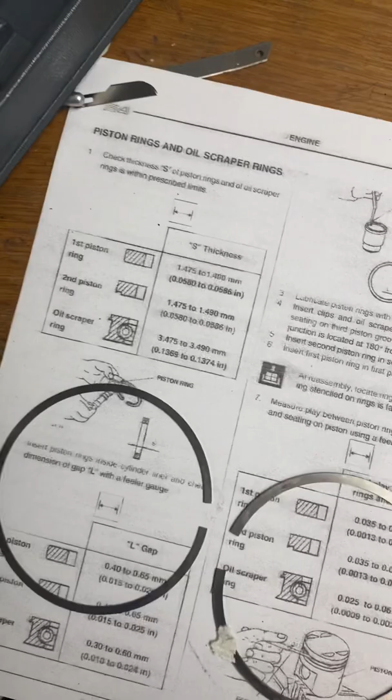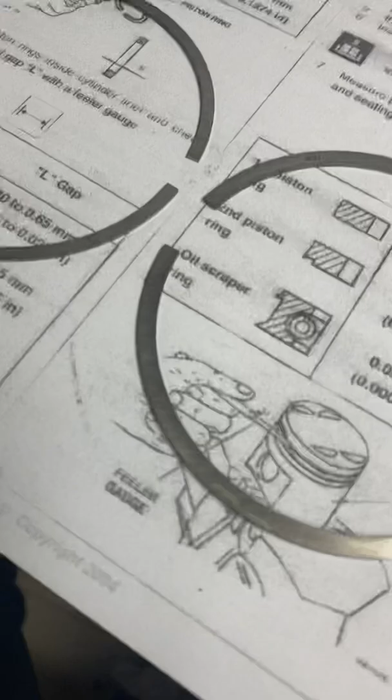So here's a dilemma for all you guys following along with the build. I was measuring my ring gap. This is the 5th one I brought out. And on the first ring, the thinnest ring, the gap is a little too tight.

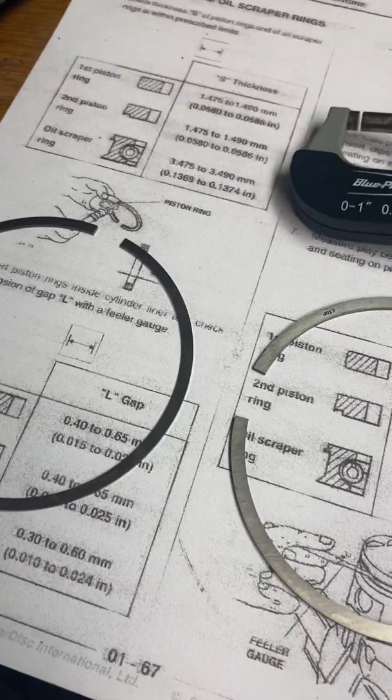So I'm gonna have to file that. But more interestingly, they give you a thickness for what each ring should be, how thick it should be. At first I checked it with my micrometer, and it came out too thin. I was like, well, I worked 7 days this week, maybe I'm tired and reading it wrong like an idiot. So I took the digital caliper

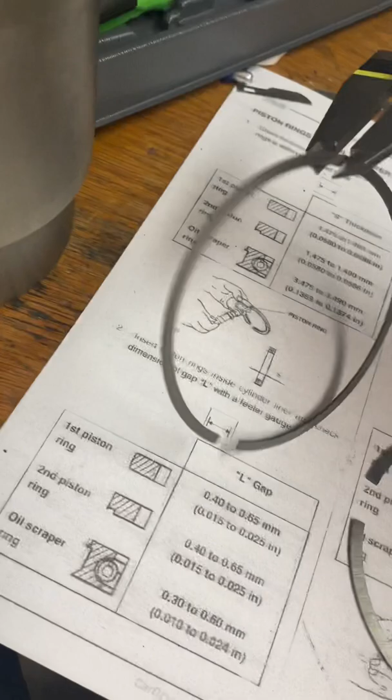I decided to do the same thing and double check my work with it. I'm getting 0.045 of an inch on the first ring. If you look at the chart, it says it's supposed to be 0.0580 to 0.0586, and we are well under that by about 0.013. That's a lot thinner.

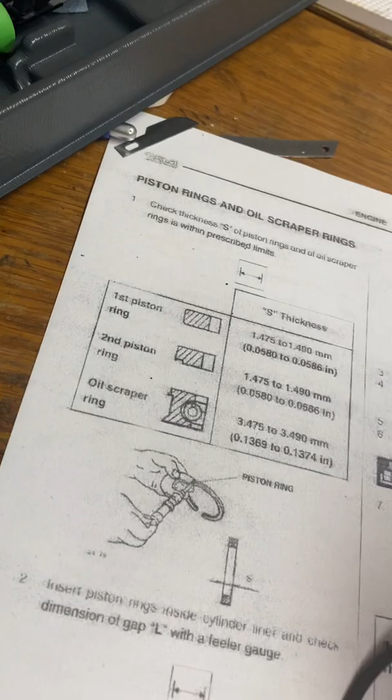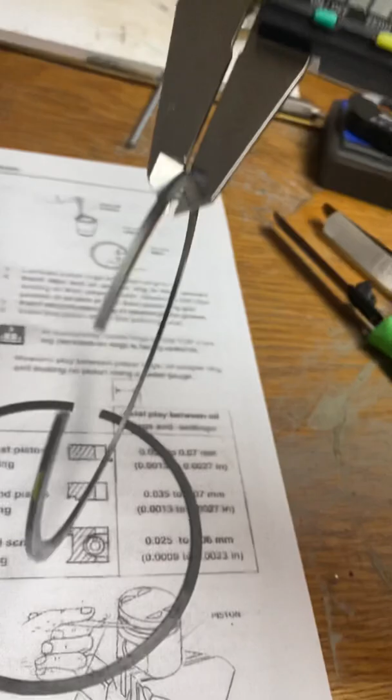So then I measured the second ring, which is supposed to be 0.0580 to 586. Again same thickness it says, and that is correct. However, when you look at the rings, they don't even look the same thickness at all. You can tell the first ring's much thinner.

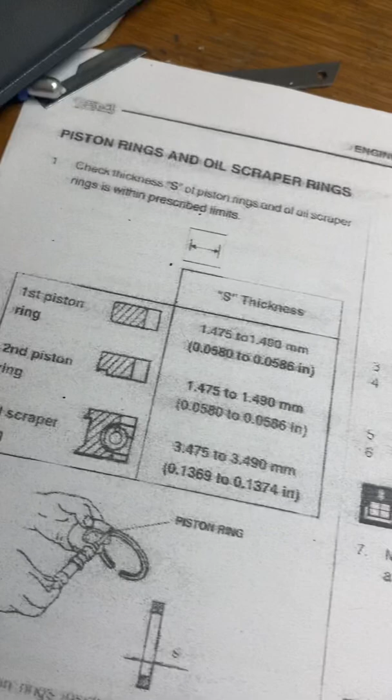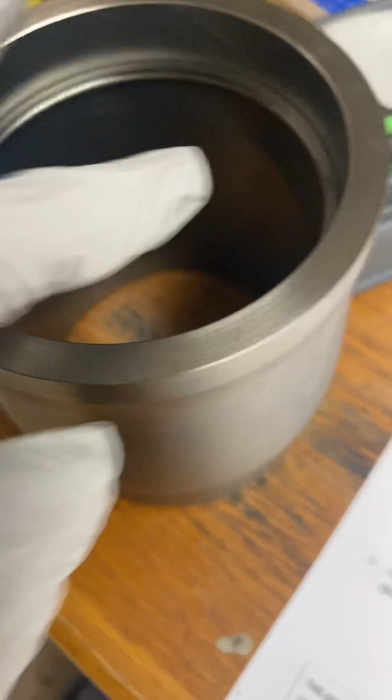So why do I have the wrong rings? First piston ring, second piston ring, and then the oil scraper ring, which is in here. I was measuring the gap, and that is the correct thickness as well. But I guess we'll figure that out.

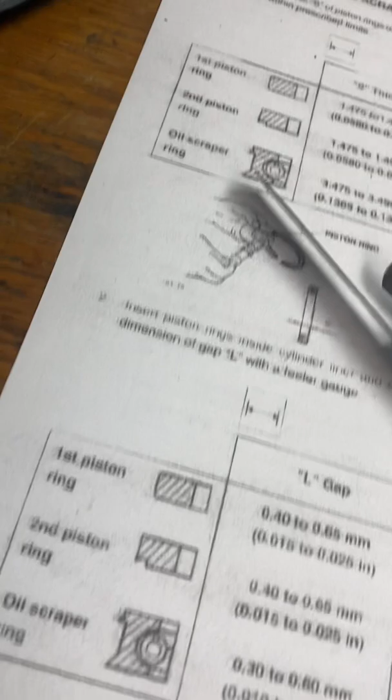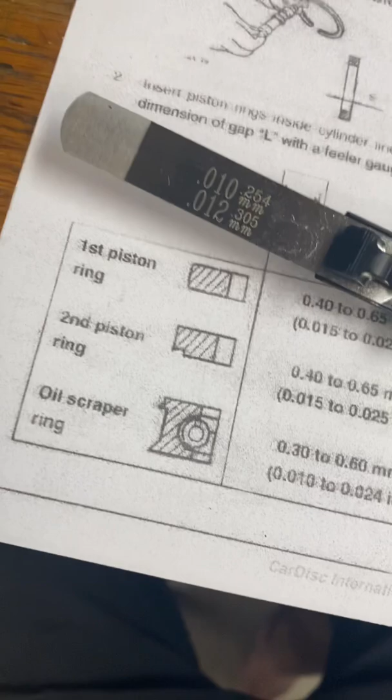But for now, the gap is pretty simple. I just put the piston ring in there, push it down with the piston evenly, and then take the minimum measurement, which for the oil scraper ring is 10th thou, so the little end of this feeler gauge, which does fit. And what shouldn't fit is 24th thou, but 25 don't fit. So that's pretty good.

Let's open up another one of these new old stock liners and see what the deal is with this one. I'm wearing gloves just because I don't want anything to flash rust. I should put my phone down first. No, I got it.

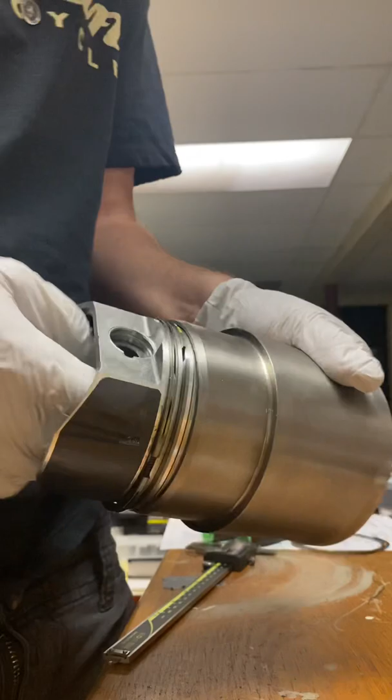So here's the second one. I'm going to see if I can stand this up in a way. There we go. So I'm going to pop this out. There's the piston, the rings.

Let's take the top ring off and see if it's still the same thickness. So I rotate it around, find this top ring, carefully remove it. These have a C - I don't know if you'll be able to see that - they have a C on the top, and the bottom 2 rings, it says top on the top. Can't mix that up, it's not good.

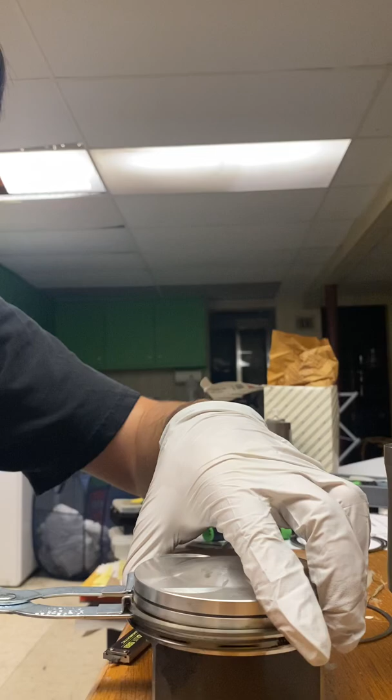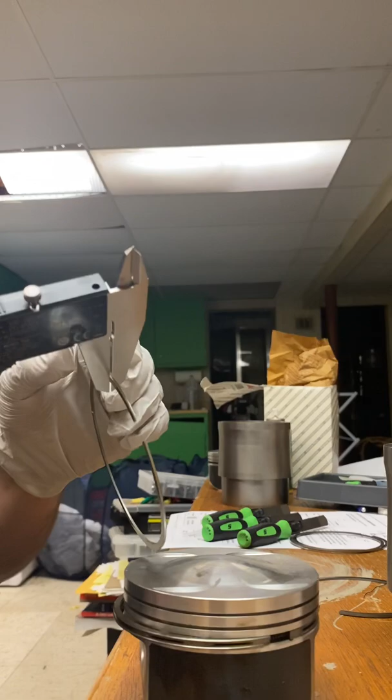So what I do is I only take off the top 2 rings at first, and I'll show you why in a second. So let's measure the thickness of this one again. 0.455, same as before with that top ring. So that's, according to my manual, that's incorrect. So that's interesting.

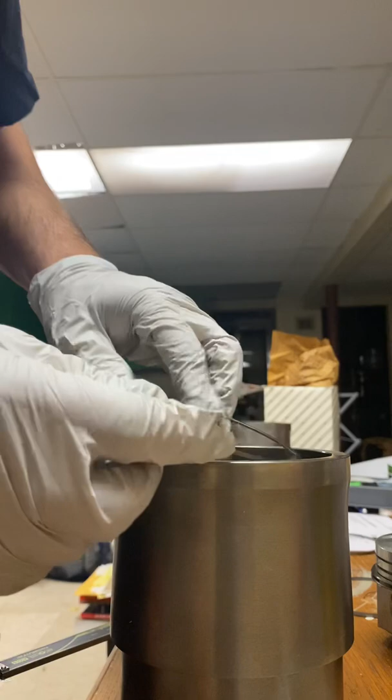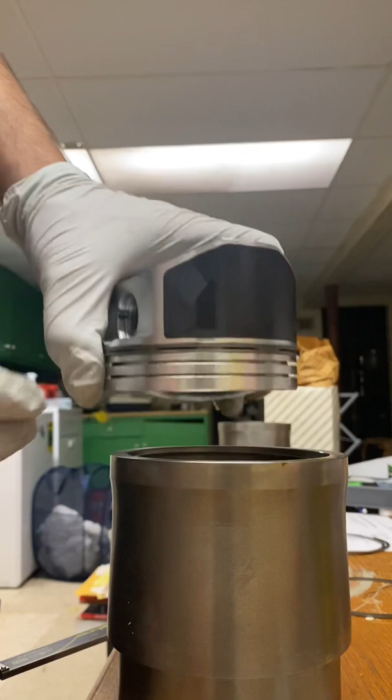But let's measure the gap. So I wipe out the cylinder, put a little bit of oil to keep the rings from scratching, rub it around in there. And then what I like to do is I start with the top ring, make sure it's facing the correct way, and pop it in by hand. The reason I leave this ring on the piston is so that when I push it in, I can hit that ring and press it evenly, so I know it's even in the cylinder.

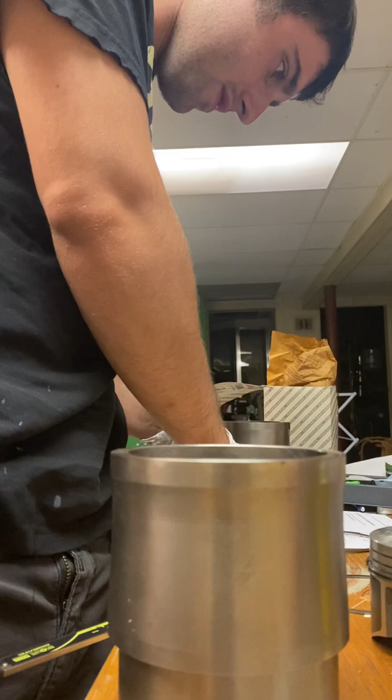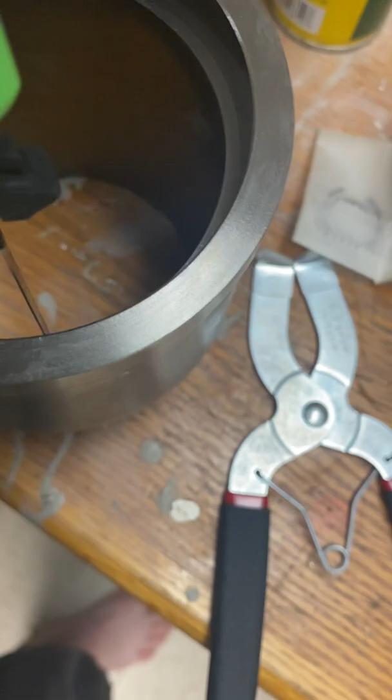Now on this one, our spec is supposed to be, first ring gap is 0.015 to 0.025. So I have 0.015 right here. That should fit. Ooh. So this one's also a bit tight and will need to get filed. But of course, that one doesn't fit. So then go ahead and try our next one.

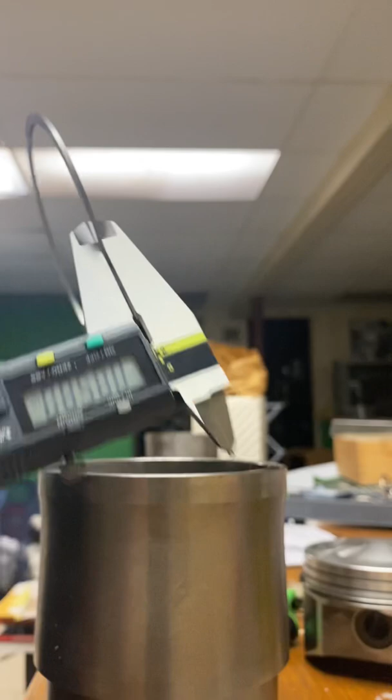I'm going to measure this one's thickness again. And that one is 0.580, so that's in spec. Make sure top - here's where it says top.

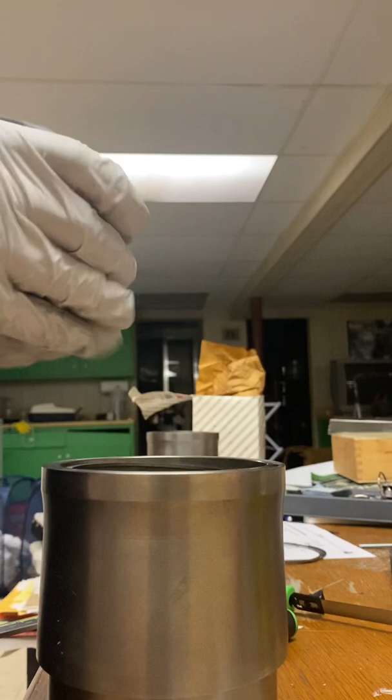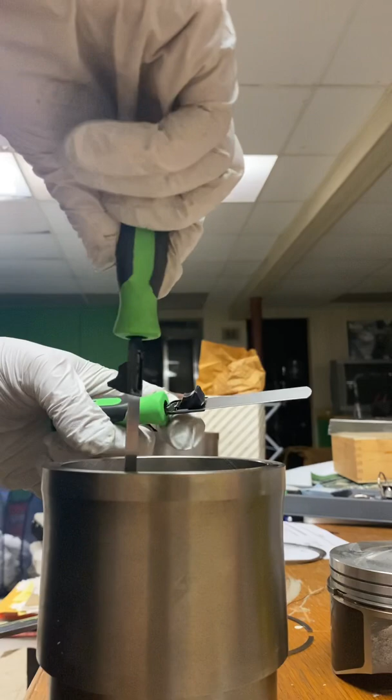This one's the same gap. Oh, this one fits perfectly. So it's larger than our thinnest gap, and it's smaller than the other, so it's perfect. Good to go, I can pull that out.

And then finally I can take off the oil scraper ring and check that, being very careful not to break the spring behind it. These ones are kind of tricky with these pliers.

You down there? Yeah. Oh, sorry.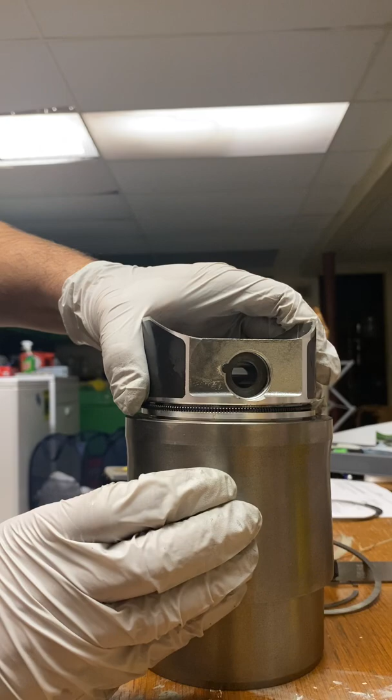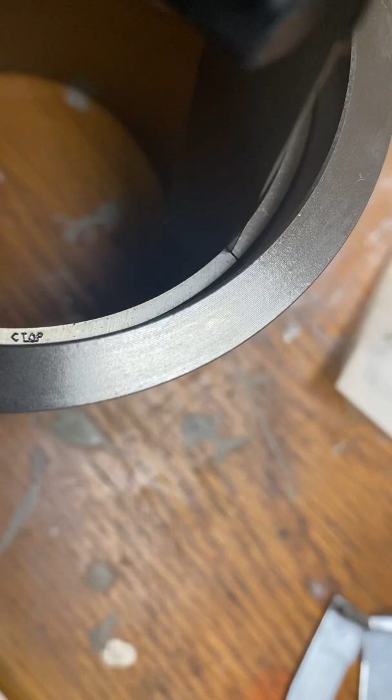So, same deal, I slide this in. This time with the piston, I just try to be really careful to make sure it goes down evenly, and I'll use one of the ring gaps there as a guide, kinda. So now this one is supposed to be 10 thou to 24 thou. So I got my 10 thou right here. Ten thou fits nice, so it's definitely larger than 10 thou. That one doesn't fit.